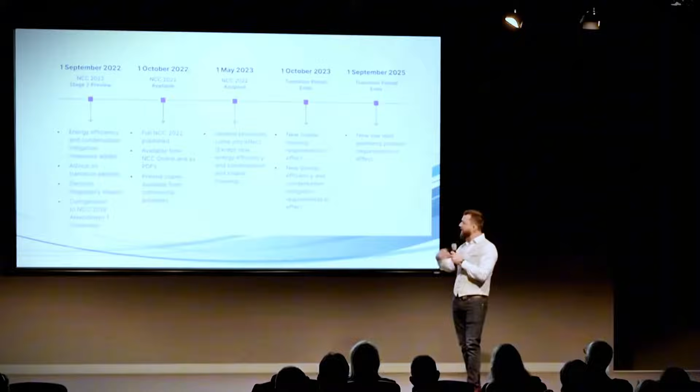So NCC 2025, I'm going to build on all the things that Ross talked about before. We did just have our public comment draft. I've modified this slide from when I did it in Sydney; we were actually in the public comment draft process at that time, so that's now finished. And what's the point? The point is that there is a process to updating the NCC. Now, I wish we had one of these for the current process. This is actually the last NCC, when we had 2022 revised. So this is a bit of a roadmap they used then to say we're going to have multiple stages of public comment review. I assume the same thing will happen this time. And then it will go into adoption stage and whatnot.

So what's it mean for us? Well, it means that there's change coming, right? Pretty simple. What are those changes going to be? I'm going to explain that by working our way down the hierarchy of the NCC. I'll start at the objectives and functional statements, touch them briefly before going into the more important performance requirements and then the new DTS provisions. So our objectives, and I think there's a really good consistent theme of simplifying things and taking out complexity. Water is water. And just allowing the document to be more usable.

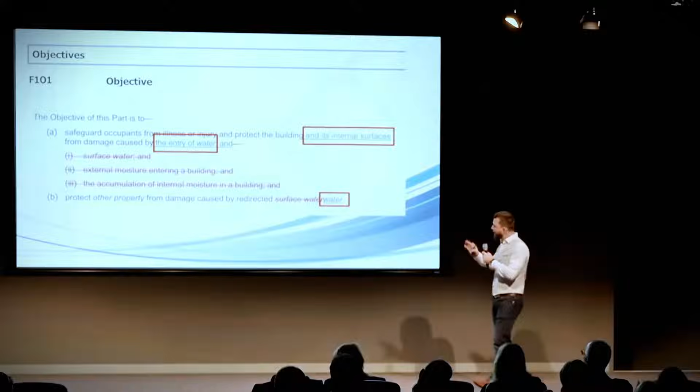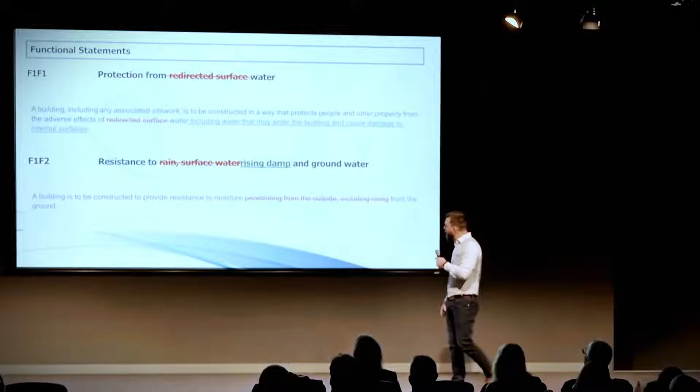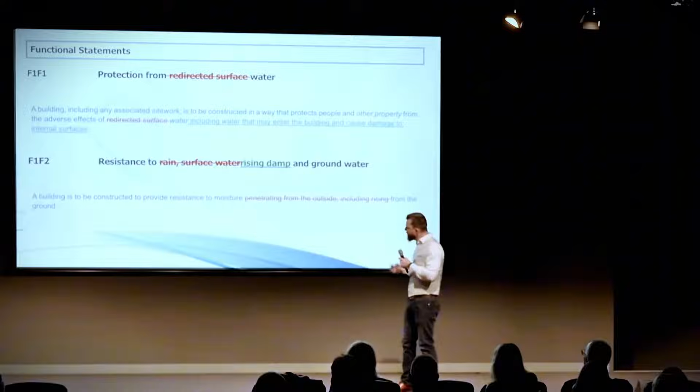So one of the introductions here is that we're protecting the internal surfaces from damage caused by the entry of water. We've taken out a lot of fluff in the middle there, and we've simplified it down to just water. So it really makes the objectives nice and clear. Functional statements are really more of the same. You can see we've taken redirected surface water and it's just protection from water now. Excellent. And in functional statement number 2, we've really made that more about below ground, because historically addressing below ground requirements and outcomes was gravely lacking. So it's really good to see that we've carved this out. It's not about rain and surface water anymore.

It's about rising damp and groundwater for functional statement 2. So performance requirements. This is the meat. This is the NCC as a performance-based code. So these are the things we're aiming to meet. And in our previous iteration, being 2022, we actually had 5 of our performance requirements. That's been condensed down now so that we effectively only have 2, performance requirement 1 and 2.

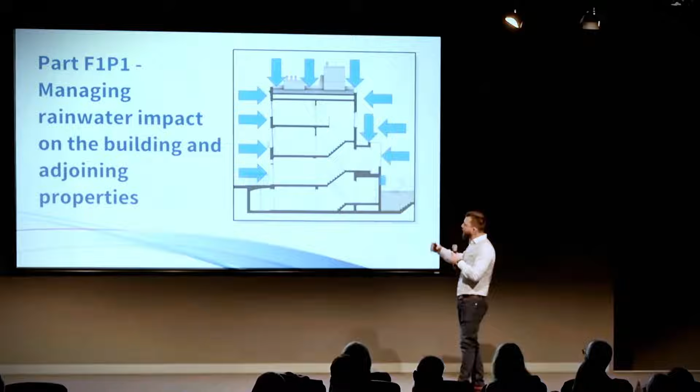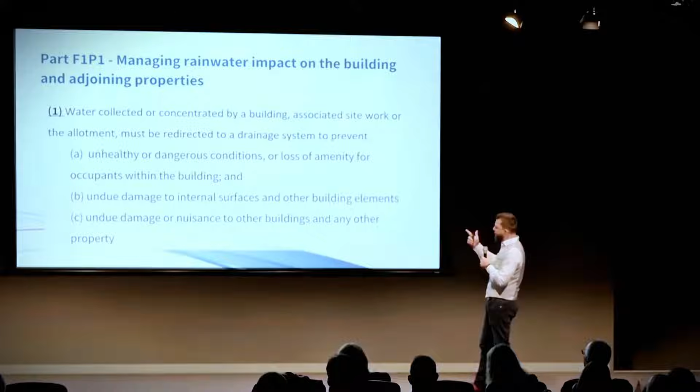And the first one we're going to talk about is P1, obviously. And as my nice arrows are showing up here, P1 is about managing the impact of rainwater on the building. So it's pretty much everything above ground in a nutshell. So we'll go into a bit of the clauses here and have a look at them. So this is the most important one. Water collected and concentrated by a building or associated site work allotment must be redirected to prevent A, B, and C: unhealthy or dangerous conditions or loss of amenity, damage to internal surfaces, or nuisance to another building.

Okay, so Ross touched on this one quite well, really condensing down water from all of these things that were randomly mentioned, which opened up a lot of dispute about, well, I don't have to protect against this one, I do have to protect against that one. So now we've just got plain old H2O, and that's what we're protecting against.

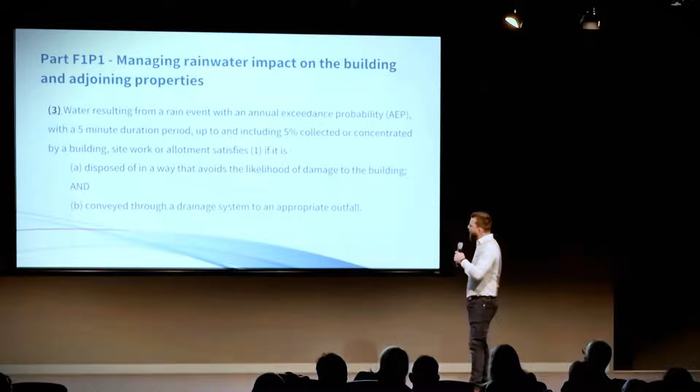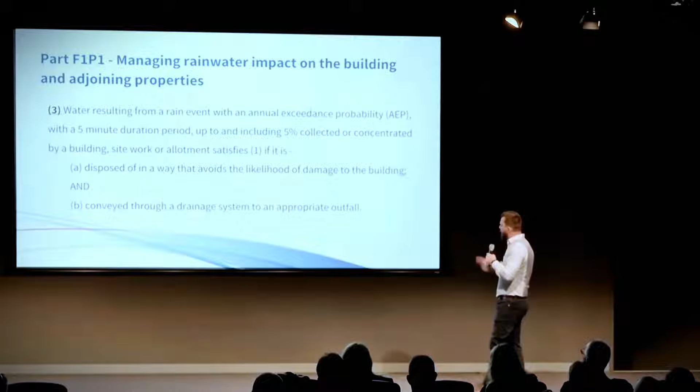So this one here starts to get a little bit complex and mathematical on us, but we do have to define how much water we have to handle. So we've got our 5-minute duration period. So we need to collect and dispose of it in a way that avoids likelihood of damage to the building. And it also needs to be conveyed through a drainage system. So that's a 5%. That's also a 1 in 20 year event, if anyone's more familiar with that terminology.

And then we go to the next clause. And now we're talking about a 1% event. So these are actually our 1 in 100 year events. They're a lot more intense, and we have a little bit more lenient things here. So we effectively need to shed water away from the building as well there.

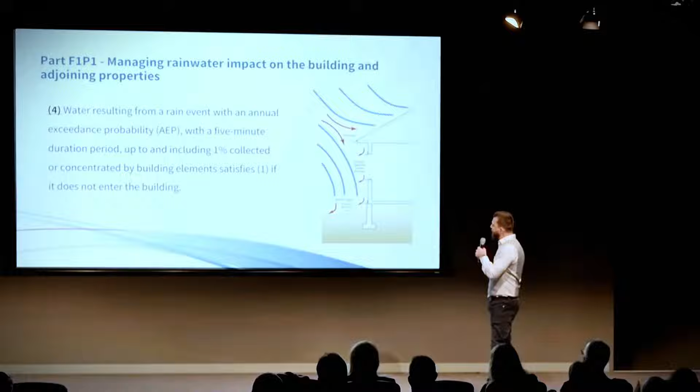So I'm going to grab a drink of water here quickly, guys.

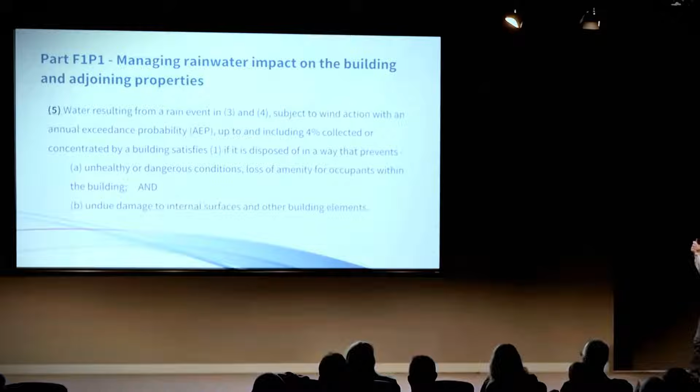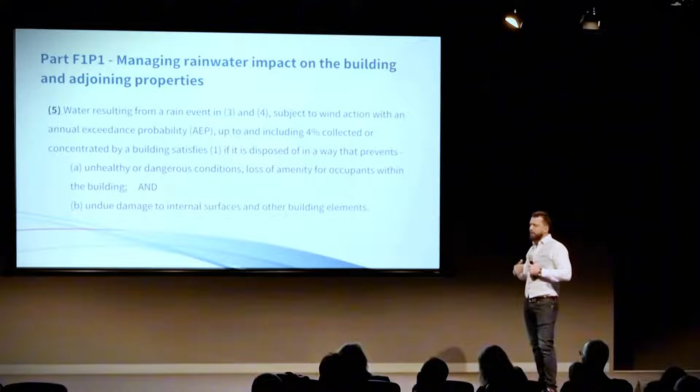Okay. So I did have to cut a couple of slides out here that talked about what our annual exceedance probability is, so I could talk about the Design Practitioner's Guide. But the important takeaway that I'm going to move through quickly here is that we need to make sure our buildings achieve their amenity outcomes, they prevent dangerous conditions or the health of our occupants being damaged, or internal surfaces.

So this is where I really just simplify it down. So what we're trying to say is that where the rainfall intensity is greater than the peak runoff, we get surface water accumulation. So to really make it simple, and all that jargon we had up there before, it was that you need to be getting water away from the building faster than it can accumulate in a 1 in 100 year event. So I've got a couple of videos here which show what happens when we do not achieve that.

Not sure if we have some volume here. It's not really critical, but I think I'm getting some help behind the scenes here.

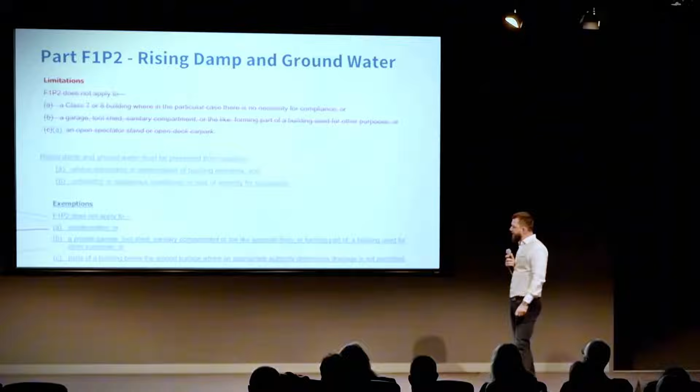So now moving on to part 2. Remember, part 1 is above ground. Part 2 is going to be our below ground. And this is effectively what we're working with. So rising damp and groundwater must be prevented from causing undue dampness or deterioration of building elements, and also unhealthy or dangerous conditions, or loss of amenity for occupants. Very logical outcomes that I think we all agree we do want to achieve in these scenarios.

And then we also have an exemption down the bottom there. Okay, so here's my diagram, pretty much just reinforcing that point that we do want to stop our groundwater from causing a problem to our internal space.

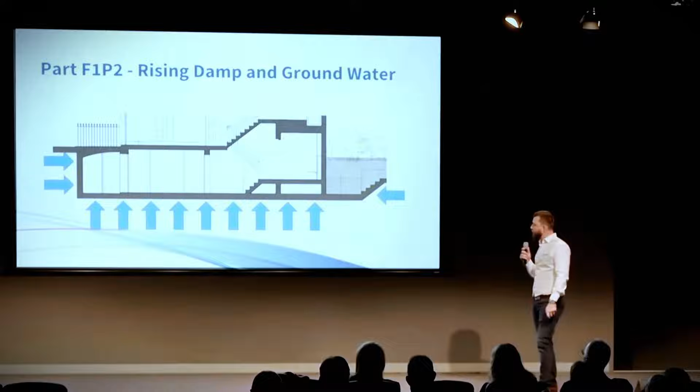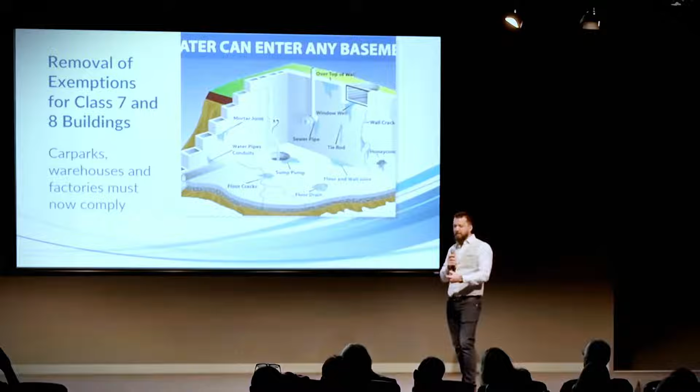Now, a key change is the removal of the exemptions for class 7 and 8 buildings. So historically, and I think this was a huge flaw in the current and previous versions of the NCC, is that it had these exemptions in there, and the way it actually played out in the industry was that certifiers were unable to really make any demand of their clients to say you need to have something in place here, because the way these exemptions were worded, whether it was intended or not, it's how they were used.

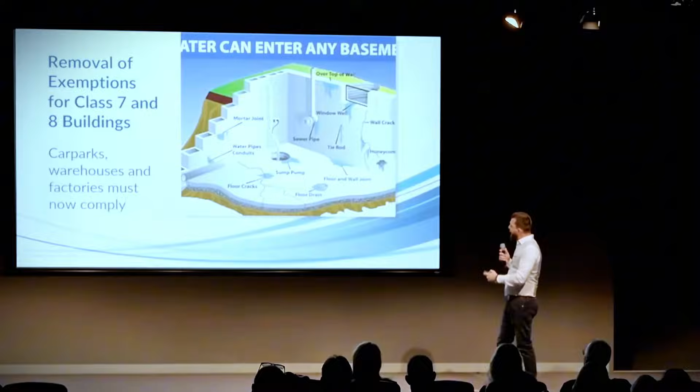So the way it played out was, we just don't even really need to think about it. We don't need to prove that it's good enough. We don't need to think about, oh, it's a car park, but we've got plant room with sensitive equipment. We've got storage cages directly against the wall, which is potentially a wet wall, the mold that might aggregate from that. So it's excellent that that's been taken out, because it does make a big difference in preventing this sort of situation. I can tell you, and I will play this.

There we go. We got a bit of sound there. I need my ominous music.

So a really good change, because I don't think anyone, or I hope not at least, that anyone in this room would want to argue that these are actually acceptable things that you would want to have in one of your properties, or have your family exposed to. So the question is then, if we're now needing to address this new, very clear, very solid, below ground performance requirement, how are we going to do that?

And see if I've got a laser pointer here. No, that's the back button.

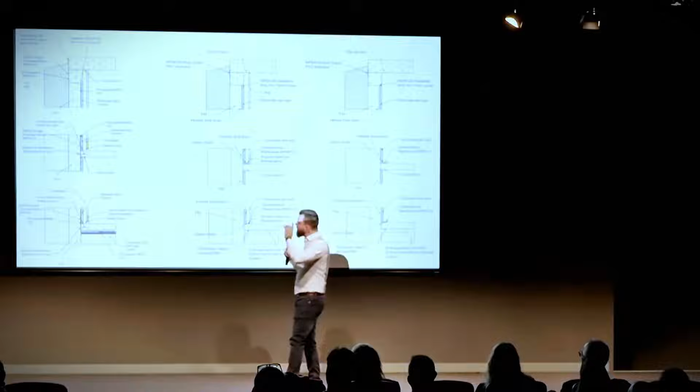So to use it comparatively, the one we have on this side here has a full continuous pre-applied waterproofing sheet membrane, big plastic bladder around the building. And then we have a drain cavity on the inside as well. So we actually have two lines of defense.

So this is a pretty robust system where even if you needed to have habitable space on the inside of the basement, you would be pretty confident that you've got enough protection measures in there to offset the potential hydrostatic risk from the water outside, right? So that's something more robust that you might use when you have a higher consequence or even higher water table on the outside, higher risk.

And then we have in these two here, I'll just combine them in my explanation. You have a little bit more of a limited amount of protection. There is no continuous waterproofing barrier. We do have different types of drains. We have a concealed cavity drain there, and then we have just an open wet wall here. And I'm not saying that every basement should be tanked or whatnot.

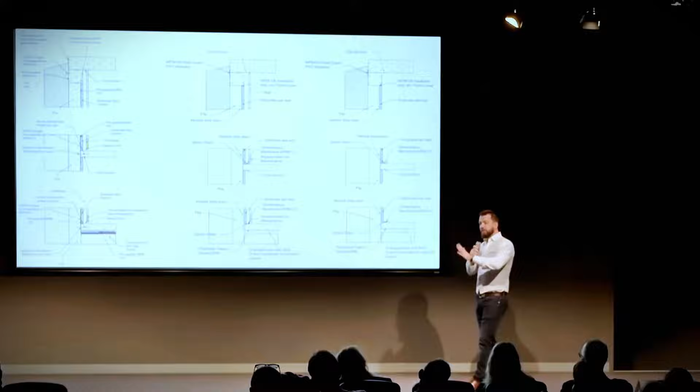I do think that there is a place for allowing a controlled amount of water in, but the key word is controlling it. And if you can prove that, and this is what performance solutions are, they're big proof documents, effectively. If you can prove that the water or dampness that you are allowing into the space will not impact the finishes, it will not impact the health or amenity, and it won't impact the structure, those are our performance requirements, right?

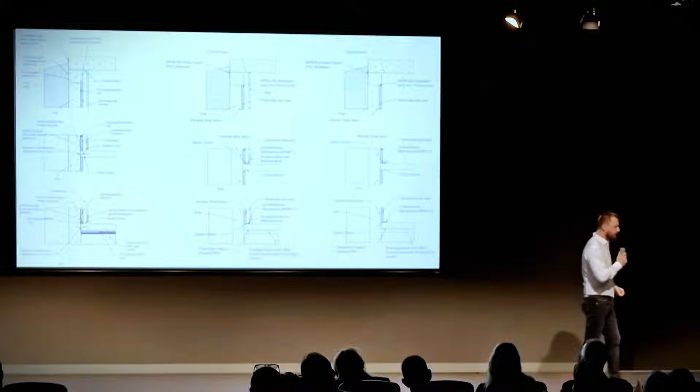So that's the decision-making process that you go through with a performance design, and it's what you can expect to see that the industry is going to attend to a lot more carefully now that we actually have these clear requirements in place. So that's our performance requirements, right? We're working our way down the hierarchy here. We've covered our performance requirements, our outcomes we need to achieve.

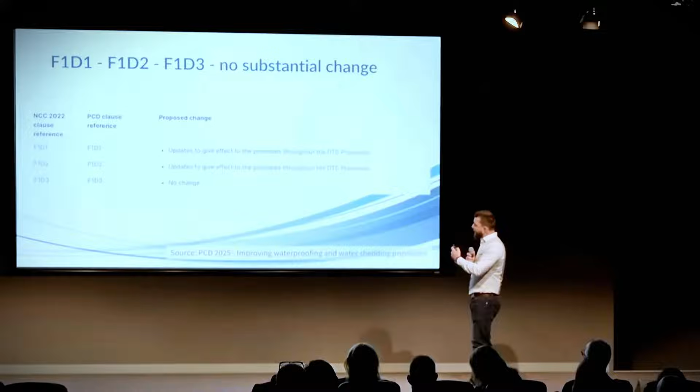Now we're going to have a look at our new DTS provisions that have come in. Ross has touched on these previously. I'm going to elaborate and give a little bit of examples, and we're going to work our way through all of the parts 1 to 15 just for clarity and conciseness, even though there's a couple in there that don't have any changes. Speaking of which, D1 to D3. For expediency, I'm just going to note them, but we are going to skip past them. I won't rehash what they are, but there's no change there.

So now we get into D4, which is our interesting one. We have a very clear statement about the structural substrate having a minimum of 1 in 80 fall. And then also something that we previously had was our drainage system that needs to convey the water in accordance with our hydraulic standard there. So that's our first point, 1 in 80 in the structure.

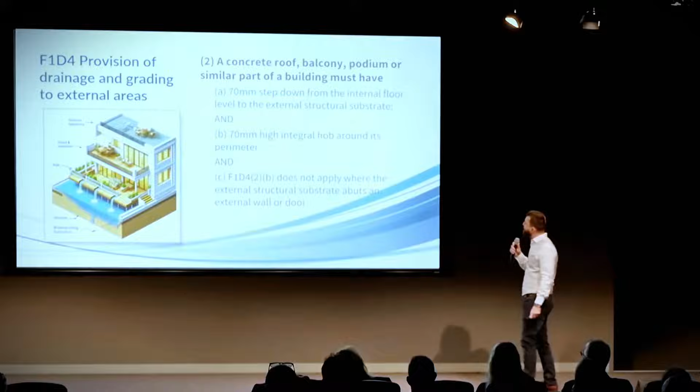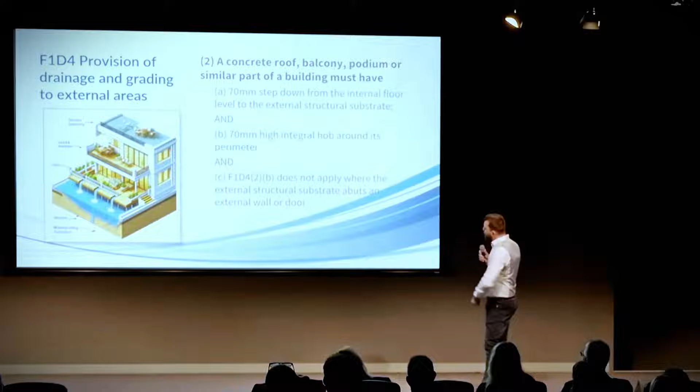Now, this is where it starts to get a little bit more nuanced in the way that you've got to read these, and I'm going to give some examples on each of these. So I'm going to jump straight into A, and then we'll progressively work through the examples on B and C. So for A, we've got 70 millimeter step down, and the words are very important here. And like Ross touched on, there probably is some fine tuning. So 70 millimeter step down from the internal floor level to the external structural substrate.

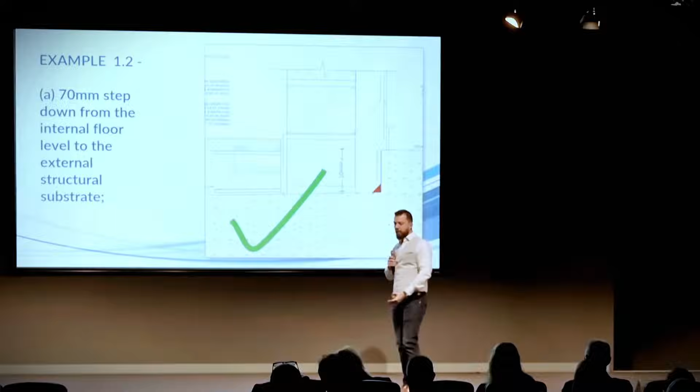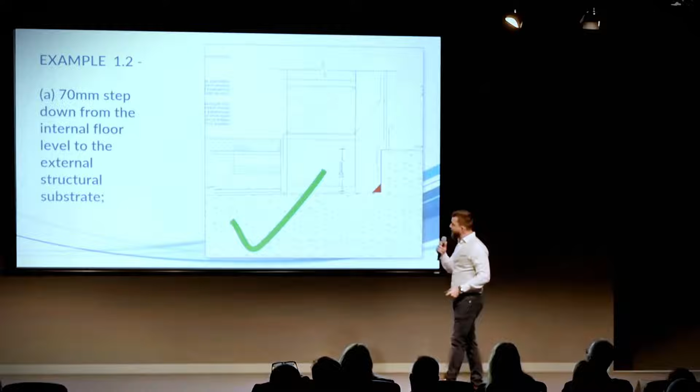All of these requirements are equally applicable to walls as well. You need to get that continuous waterproofing upturn, structural upturn in this case. And that's what I'm trying to show off here. So 70 mil step down in our wall.

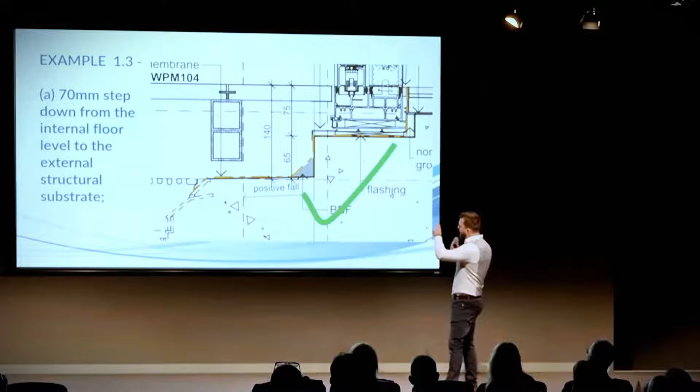Excellent. So now we've got something a little bit more complex here. You can see we've actually got a quite large 140 millimeter step down here. And if you follow the direct words there, we've got our external structural substrate, and then our internal is all the way up at 140 millimeters above. So quite good.

Now, this is the point which needed a little bit of clarity, right? Because in this particular image, you can see that we've got a flush transition there, and our concrete slab is also almost flush. And it does actually comply with the current wording, but I know that the intent here was to actually have a structural step up so that we have a structural barrier. So one of the public comments I made, and I'm sure others did as well, was to look at that wording and say, we know the intent is to have a structural fold there.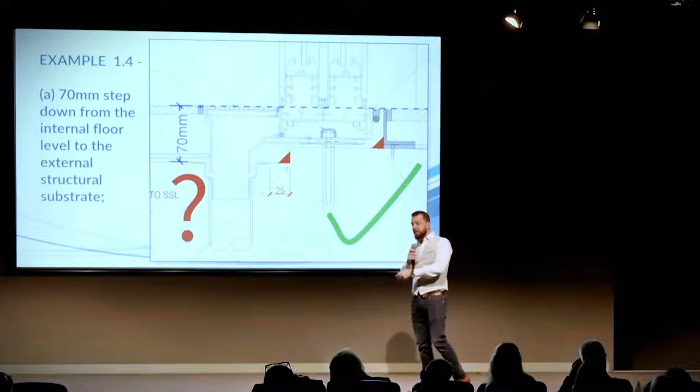So currently this detail is actually compliant with that, but we're expecting revisions to be made off the back of public comment that will fine tune this. So we'll see that when that comes out. And we've got the next year or so to work up towards it before we need to start designing and constructing these.

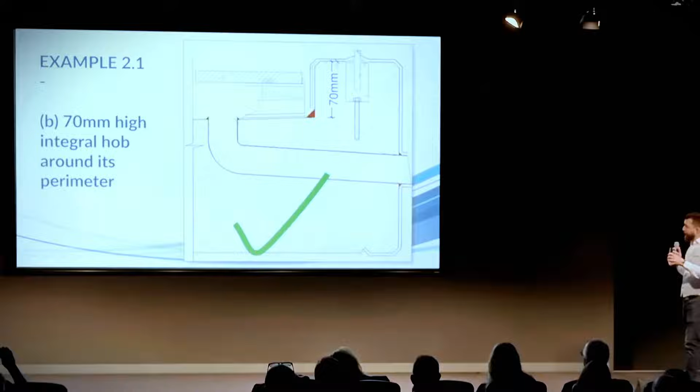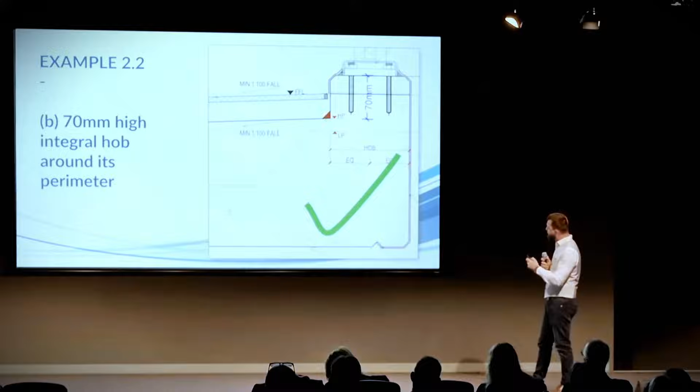So now we move on to point B, which talks about having hobs. Nice simple example here of a 70 mil hob around the perimeter, tile and pedestal on the inside. And some good drainage as well. Similar but different here, we have tile and screed on the inside. Still has the 70 mil integral hob around the perimeter. And so the question is, if we need to have a 70 millimeter integral hob around the perimeter, do we put another hob on top of the step down that we already had?

Well, to answer that question, we have clause number C. And what it says is that you don't need to put the hob where you have an external structural substrate that abuts an external wall. And again, the wording there's a little bit tricky. So I put up a diagram here, which clarifies where you need to have a hob, where you need to have a step, and also where we have a wall which is external to external, where you don't need anything at all. So I think this clause is actually really well worded. It just takes a little bit of time for you to get your head around.

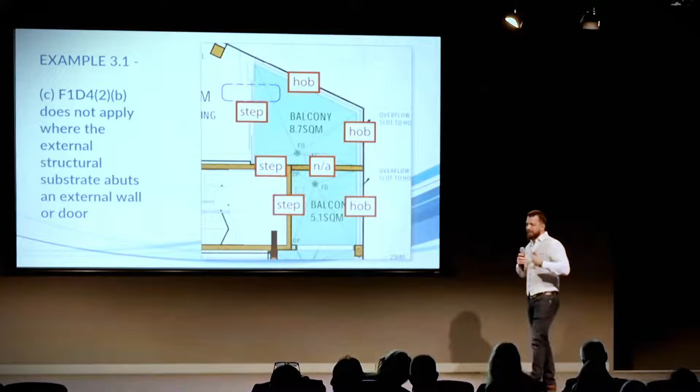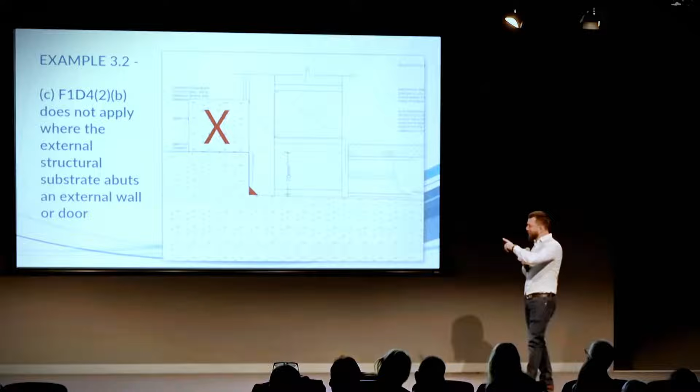Cool. So yes, we've clarified that we do not need an extra 70 mil hob on that step down. If we have any concreters in the room or anyone that's in the know, I'm sure you'd agree that that would be extremely hard to form, both a set down and a hob on top of each other. So very good to know.

Point number 5, substrate materials. So we now have this new clause which pretty clearly states that the structural substrate can consist of either reinforced concrete to AS 3600 or an FC sheet that complies with AS 2908.2. And of course, it needs to be free of any variation or defects that would impact the performance of the membrane. So that gives us a very narrow scope of what you can apply your membrane to.

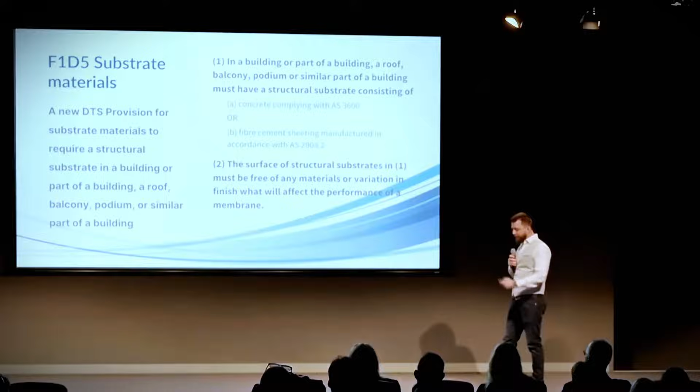Because just to be clear, the substrate is the surface to which you apply a membrane. So you can apply a membrane onto those, but not anything else currently. So let's have a look at some diagrams here to explain that. Here are our 2 compliant substrates. Well, the reinforced concrete isn't poured yet, but you get what I mean. Cool. Now, we have established that, I'll just go back. We are going to talk about this a little bit more in future slides where it combines with another clause. But just for now, just remember, those are our 2 substrates that are acceptable to apply a waterproofing system to.

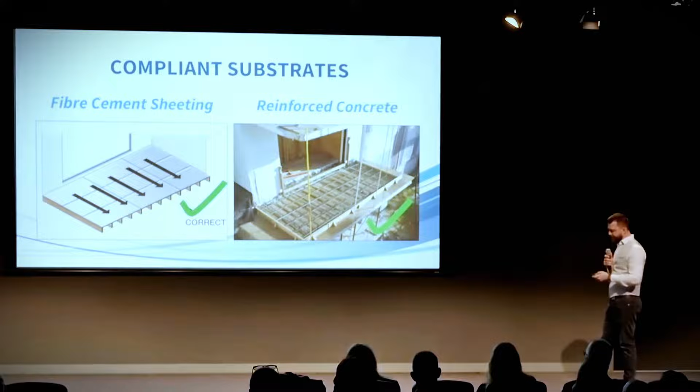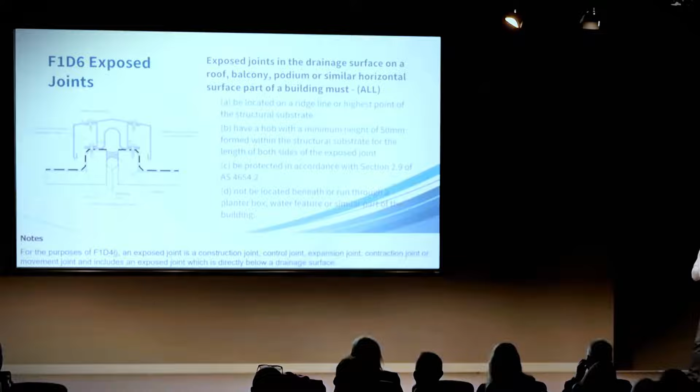But before we do that, we're going to talk about exposed joints. And these have been bolstered up a little bit here. So we really have 4 things that we need to cover. So the joint must now be located at a ridgeline, at a high point. So high point is created by the drain points being the low point. You need the water to fall to the drain. If you make sure that you have your movement joint, which has a hob and whatnot, at the high point, you're never going to get into a scenario where your water is trying to run to the drain and it gets blocked by a nice structural movement joint here.

Point number 2 is that it must have a hob on either side. We've seen plenty of movement joints that are built with just 2 flat slabs abutting against each other. That doesn't provide any structural upturn barrier to water leaks that might occur in that scenario. So we now must have a 50 mil hob on either side.

Point C is that it needs to be protected in accordance with our external waterproofing standard. That is where that detail shown on the left there is taken from, our external waterproofing standard. And finally, and this isn't a new one, this has been in the NCC 2022, it says that these joints must not be located beneath or run through a planter box, water feature, or similar part of the building.

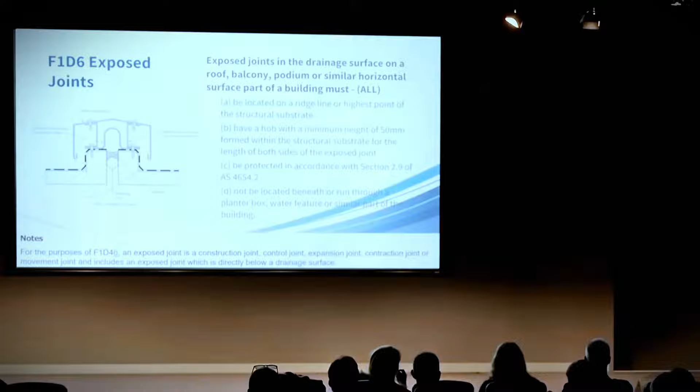Now, a question we get on that one is, well, this is just movement joints, right? We agree that movement joints shouldn't run through a planter box. But what about my CJs? This doesn't apply to that, right?

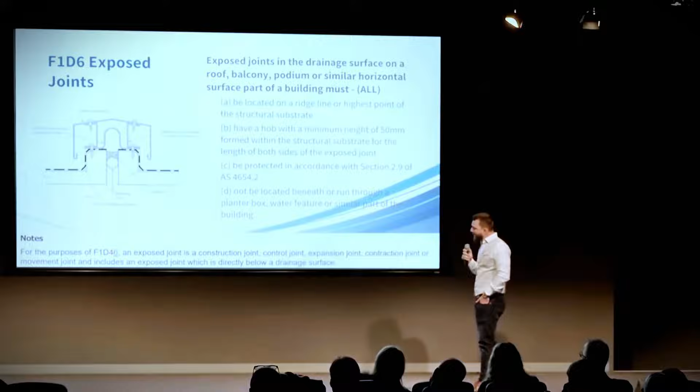Well, we have our note in the NCC here, which states very clearly that for the purpose of this clause, an exposed joint is a construction joint, control joint, expansion joint, contraction joint, movement joint, or any other type of joint. So don't fall into the trap of thinking it's just if it's got movement. It is any type of joint that you must apply this to.

Okay, external waterproofing membrane. I've only highlighted point number 2 here because point number 1 existed previously. It's nothing new. It says that we need to have compliant waterproofing materials installed in accordance with the standard. What is new is that this compliant membrane, where it's required to be applied to a concrete roof, balcony, podium, or similar horizontal surface, must be installed directly on the structural substrate.

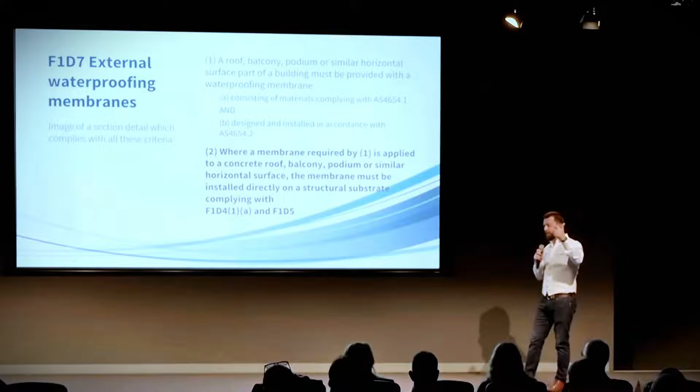Keep in mind, before we identified that our structural substrates are only reinforced concrete and fiber cement sheet. So if you're reading between the lines, this is taking out screeds, which I'll talk about in a moment. But before we do, what comes before you actually apply a membrane? Substrate preparation. In order to apply a membrane to a substrate, you need to prep it, right?

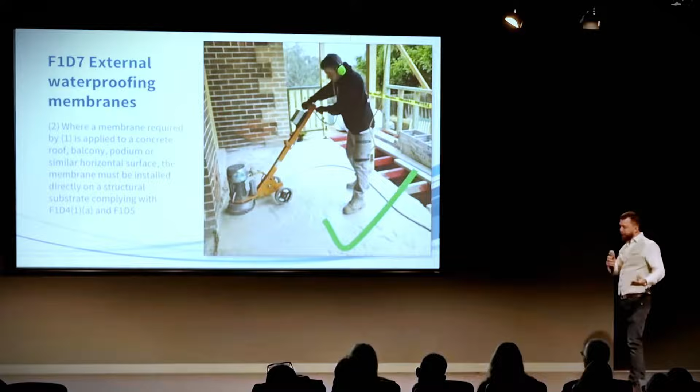So grinding it, no problem. You're just changing the profile of that structural substrate. You wouldn't grind an FC sheet, but reinforced concrete's no problem. So that's okay. But with the current wording, and this is something that I have no doubt will be addressed in changes, I put my own public comment in about it.

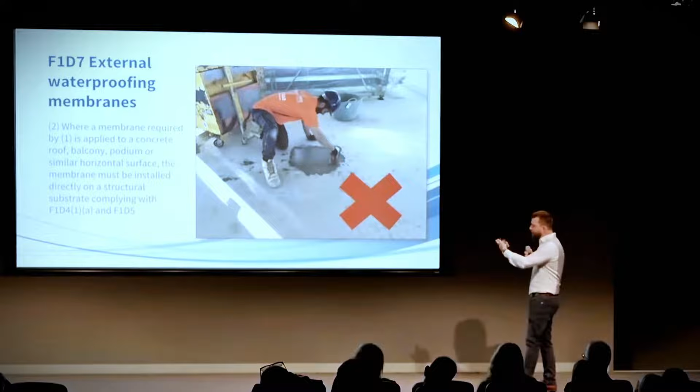If you apply a repair mortar, a leveler, or anything of that sort, that's not technically reinforced concrete in accordance with AS 3600, right? So if we're applying a membrane over these repairs, we're technically non-compliant with those clauses. I'll just put a couple of other examples up here. Same thing.

So we're yet to see how this will be addressed, but a logical accommodation might be to say that you can do localized patch repair to up to 10% of the concrete surface area or something to that effect, which means you could easily do your set downs around the perimeter. If your concreter stands on the timber and all of a sudden you have a big rebate in the set down, you could do localized repairs on those, but there would be a limitation. So we'll wait to see what comes out of that, but this is currently the state of it.

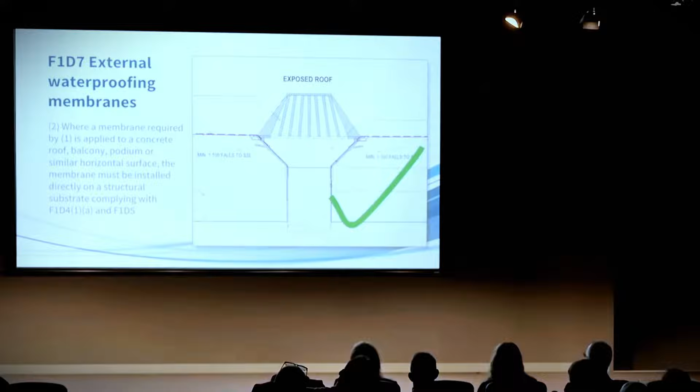So nice little diagram here showing a waterproofing membrane applied to the structural substrate. Pretty simple. So that gets our compliance tick. And then we've got a comparison here, half right, half wrong. This diagram shows the two options which are very commonly employed in, say, internal wet areas or balconies. This is a balcony here.

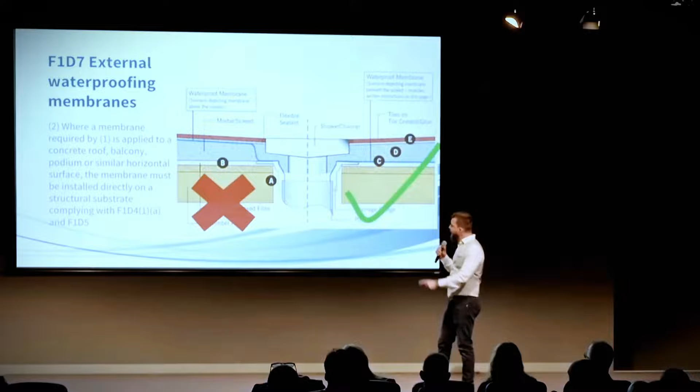On the right-hand side, we have our waterproofing membrane applied to our structure, FC sheet in this instance. On the left-hand side, we have a waterproofing membrane applied over the top of the screed where falls have been achieved. Now, I will note that the one on the right is also technically non-compliant because there doesn't appear to be any fall in the structure, but for the purpose of this particular clause, the membrane has been applied to that substrate correctly.

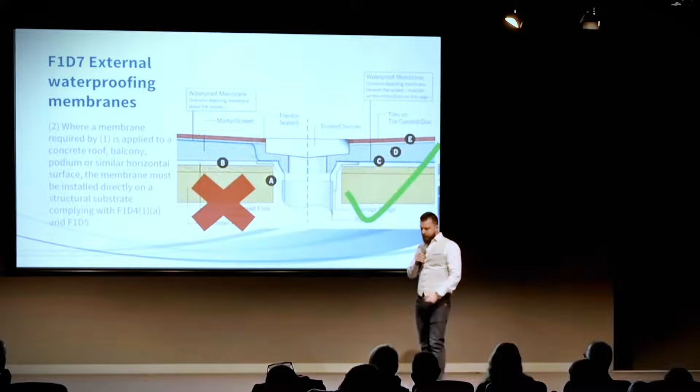I'll just touch on this one really quickly as well, warm roof buildups, for anyone that's in the remedial space, condensation management.

Tim, I'm looking at you.

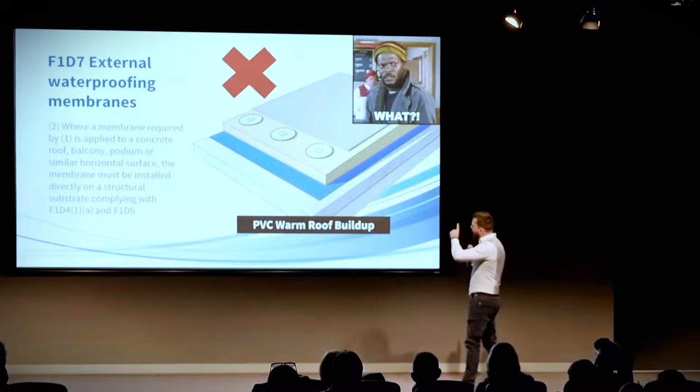We're effectively applying our PVC sheet membrane. And this is a really good buildup, by the way, one of the best things you can do with your building. We're putting it over the top of our insulation. So technically our waterproofing membrane is being applied on insulation, not on the structure.

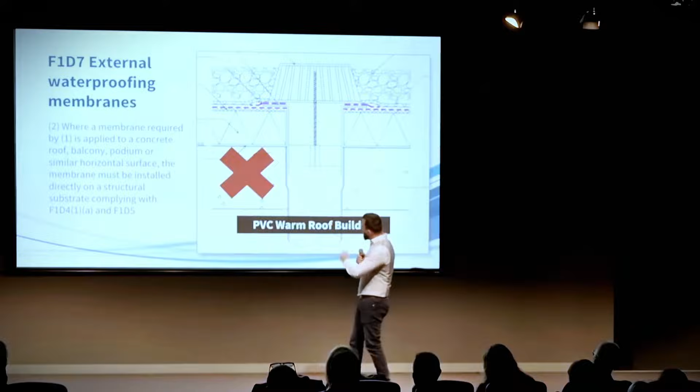Another detail that shows pretty much the exact same thing. Now, you might be wondering why, if this is non-compliant, I said it's a really good detail. It's just not covered by the DTS provisions at the moment. You always have a performance-based pathway, and I'd be extremely happy to validate the performance of this system because it does work really well. Okay.

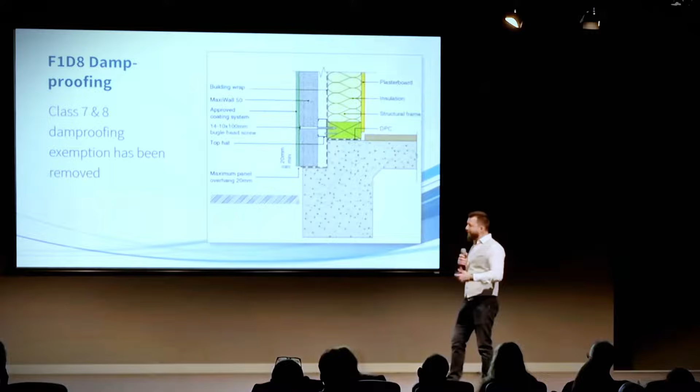Now, damp proofing. We've effectively just removed our class 7 and 8 exemption here. You've got to remember, a lot of people will look at class 7 and say it's a car park. Well, what's the problem? Class 8s also include laboratories. Class 7s do include warehouses and stuff as well. These areas can definitely be very sensitive to moisture. So having these exemptions removed, so we're forced to think about whether we're doing enough, makes a lot of sense. No change for damp proofing.

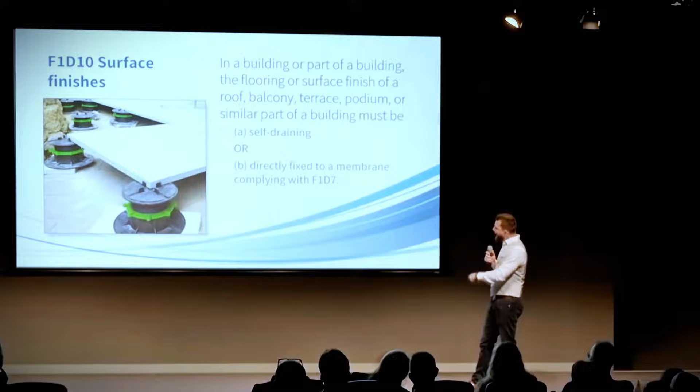Surface finishes. I won't talk too much about tiles and pedestals because I think Ross covered it very well. So we've got two surface finishes. They must be either A, self-draining, such as our tiles and pedestals, or say a timber deck as well, less common but still complies, or B, directly fixed to the membrane. And that's the one I want to talk about. So in this scenario here, you can see that we've got our FC sheet system. We've got our waterproofing applied directly to our structural substrate. Great. And then we've also got our surface finish directly applied to the membrane.

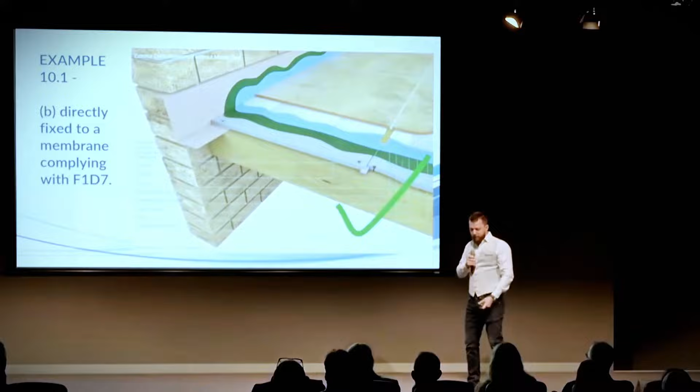So now we're adding up all of these clauses that we've been talking through. And I hope I haven't lost you. We're adding them all together to say, okay, this is what a compliant buildup looks like now. And I'll just show something to the contrary. When we put a screed in here, even though we have our waterproofing membrane directly applied to the FC sheet, our floor finish being the tile is no longer directly bonded to our waterproofing membrane.

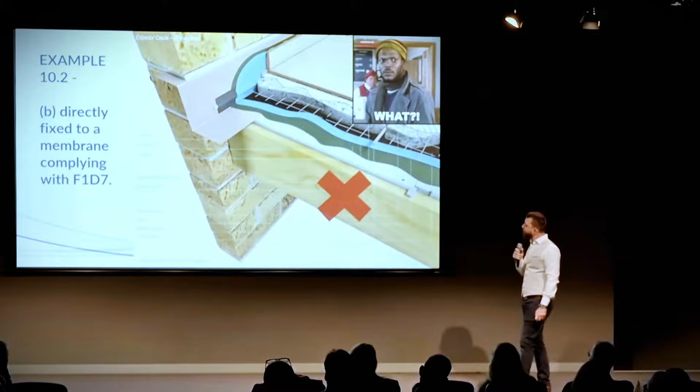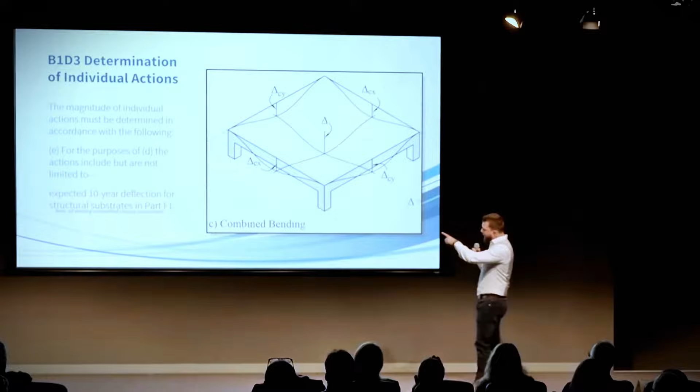Cool. So 11, 12, 13, no changes. 14 is for glazed wall assemblies. We've again removed those exemptions. So yes, things that we weren't previously thinking about, we now have to validate, be aware of that. And finally, we've had this added in. It's not in the waterproofing DTS provisions, but it is a new structural provision. And the key word there is that we now need to calculate the expected 10-year deflection for structural substrates. Reason being, as Ross said before, you have deflection, you didn't have ponding before, you now have ponding, entrapment of water, and inevitable failures.

So I moved through that a little bit quickly, I know, but I want to recap now to really just drive home the current state of it. Does anyone want to guess what our 4 key points for DTS compliance were? Anyone brave enough to put their hand up? There'll be a prize in it for you later. Yes, we've got one. Fall in the structural substrate? That's exactly right. That's one of them. Anyone want to pull another one? Membrane directly on the substrate. That's exactly right. And what does our substrate have to be? Concrete or FC sheet. That's exactly right.

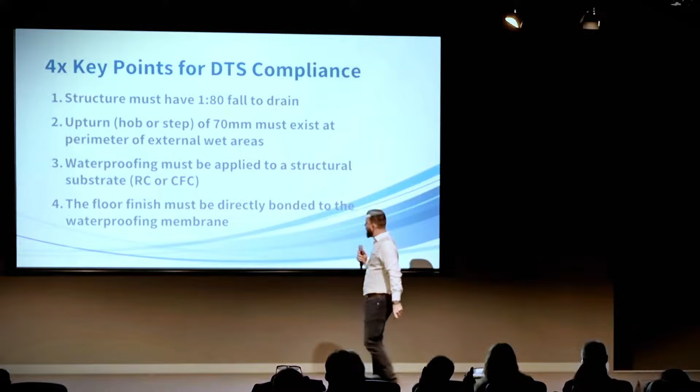There's one more I'm looking for. 70 mil, yes, that's in there. It's actually combined into one of them, so that's awesome. What about the floor finishes? What do we have to do with those? Directly bonded to the membrane. So we'll reveal all of these now. This is really everything boiled down. All of those changes boiled down into these 4 key points. So definitely grab a photo of that one so you can have a think about it later.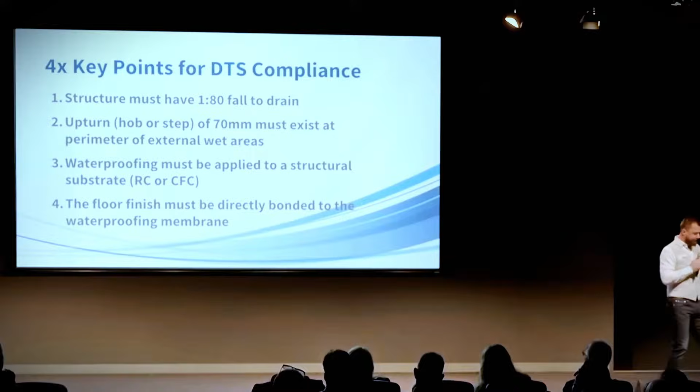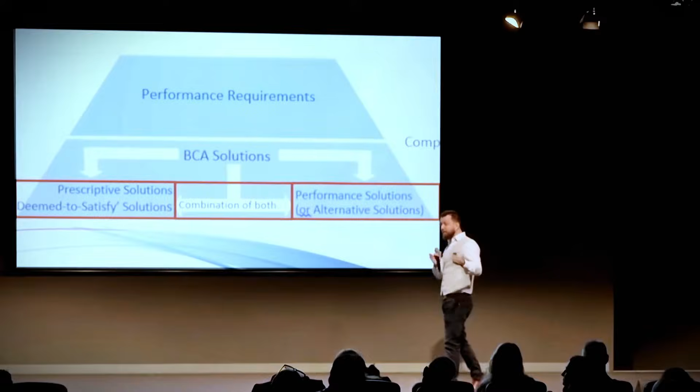Cool. So this might be a bit of a change, right? There's tilers that have been doing screeds forever. We're now saying that you need to direct bond your finishes. We need to do all of these things differently. Well, it's not as bad as you might think, because I'll take you back to how the NCC actually works. And while we do have those DTS provisions that say, if you do this, it will be compliant and it will also work, which is the point, we do have another pathway as well outside those.

And that is performance solutions. And this is a really cool diagram, really well done, which shows what those 2 different pathways look like. On the left-hand side, we've got deemed to satisfy. We've got our types of evidence there, which I won't read out. And then we also have our performance solution on the right-hand side. So we can go down that pathway of performance solution.

It is possible to build things with screeds, with a membrane on a screed, with various types of buildups that will work. It's also possible to build them so that they fail, which is what's happened, which I know Ross will say was a massive catalyst in making those changes. So what does it really mean for us? It doesn't mean that we can never, ever do those things that you're probably familiar with in conventional construction. It means that you have to think about it and prove it. That's all performance solutions are. They shouldn't be scary. There is effort that needs to go into them.

But really, it's just saying, if you want to do this now, prove to us, the certifier, the owners that are going to have to live in it eventually, prove to us that you've thought about everything that could go wrong here and that you have something in place so that you know it will work.

So, on to part 2. I'm running a little bit behind on things, so we're going to push through pretty quickly, but these are all pretty straightforward. I should give a bit of a preface here in why I really wanted to talk to you about this. We've been doing something very similar in New South Wales for the past 3 or so years now, right? And that's what I've got as the transition. I think after reading through the documentation practice guide, it takes all the good things out of what we're doing in New South Wales, adds in some extra things which make it even better. So I think you're off to a really good start by building on a foundation and learning from the mistakes that we've gone through in the past 3 years. So that's a really good thing.

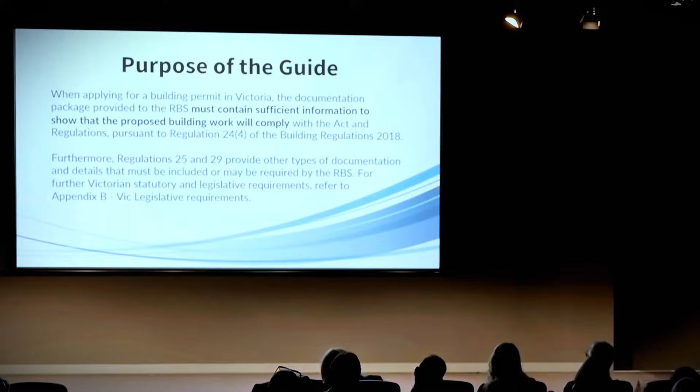Now, this is the purpose of the guide. For the sake of time, I won't read the whole thing, but the point in bold there says that the documentation package must contain sufficient information to show that the proposed building work will comply. If you don't draw something, if you don't have a section detail of how to detail an overflow, you are not showing how your building is going to be built that's complying, right? So that's really the name of the game, is to show what we're going to do. The building certifier, RBS, can have a look at it, and they can say, I see what you're doing, and I agree that it's good. So what does this look like?

Well, I'm going to read through the clauses, and these are the things I've picked out that are specifically relevant to waterproofing. There's a lot of non-waterproofing stuff in there. This is just waterproofing. So, point 1.2.2, building enclosure. Construction methodology details the waterproofing of habitable areas below ground. Pretty important. This is a nice diagram of what an effective waterproofing of below ground space would look like. Waterproofed wall, structural wall system. I believe this is a Dincel system.

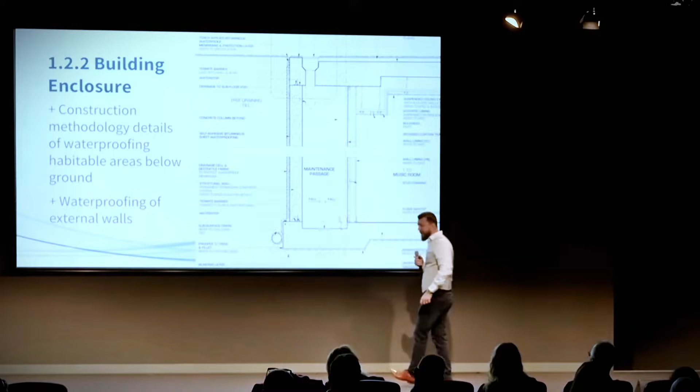Then we've got an internal maintenance passage, which controls the humidity. And then we have the habitable space on the inside there as well. Cool. Moving on. Section 1.2.3, waterproofing internal. We need to have layout plans. There's a whole lot of things that those layout plans need to show, such as extent of waterproofing, location of water stops, drain points, falls, and so on. That's actually detailed really well in the guide. I've just got some examples of what that would look like up here. We also need to show elevations.

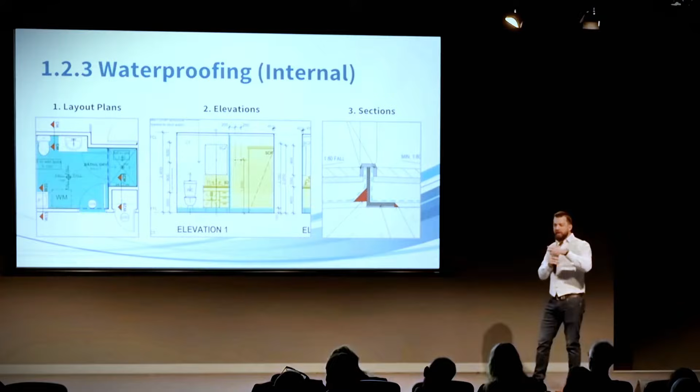That's a little bit of an old one, but it does clearly show the extent of various membranes. And then we need section details. Devil's in the detail. Where things go wrong is normally where a section or a junction has been poorly detailed. And I have a good example of that a little bit later.

So now we move on to external. External, again, we have layout plans showing our membrane and other things, and then we have section details. So one thing to be aware of is that our layout plans are 2D, right? We build in 3D, so we add in section details to give us that information on what's happening vertically through there, so that we can actually build it effectively.

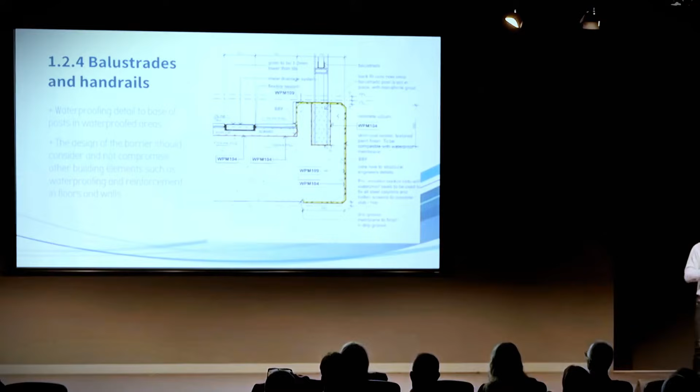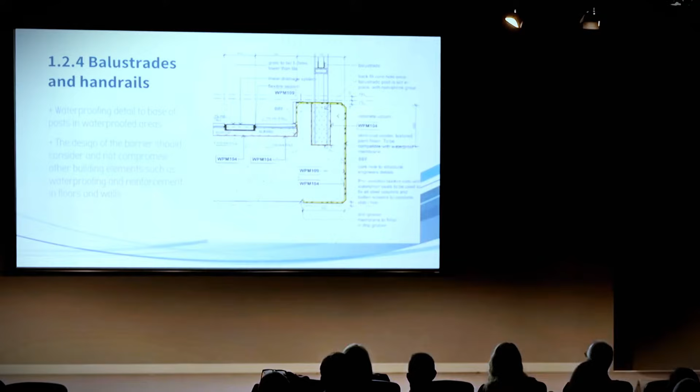Balustrades and handrails. This is mainly a structural provision, but it does wisely include a requirement for the waterproofing detail and how these will be detailed. And the design barrier should be considered not to compromise other building elements such as waterproofing and reinforcement. We see quite often that they're an afterthought. Waterproofing goes in, or the building finish goes in, and then come in the fixings and the base plates and just punch straight through everything. So talking about how we're not going to do that is a great idea.

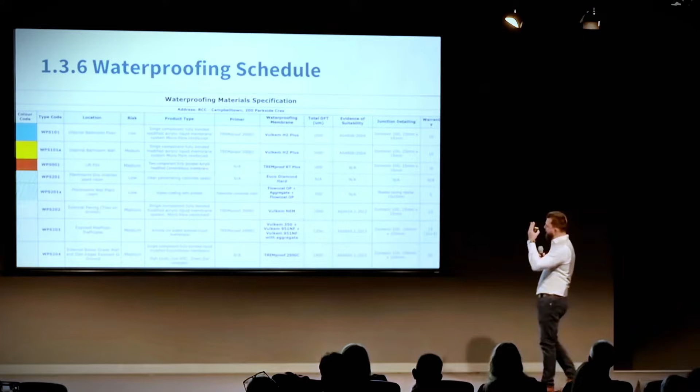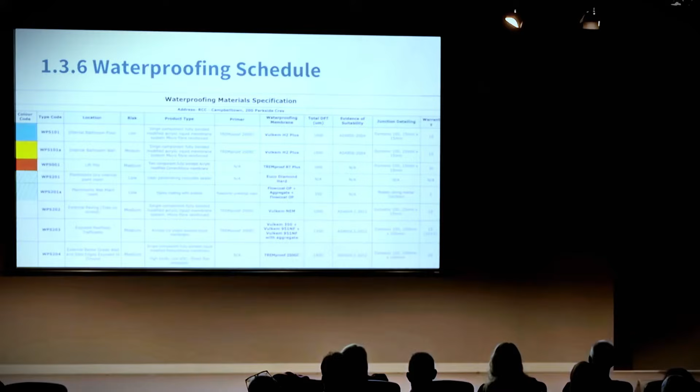We also have a little bit in lifts. Lifts, you don't want water in your lift, so you need to actually show how that's going to be achieved. And lastly is the waterproofing schedule. So this is a breakdown of all those different locations that are shown on our layouts. It talks about the risk in those areas, the product types, the primers. This is probably a little bit more detail than maybe is needed there, but it shows exactly what products are going to be used, because it's very easy and very common to use a good product in the wrong location and get a bad outcome.

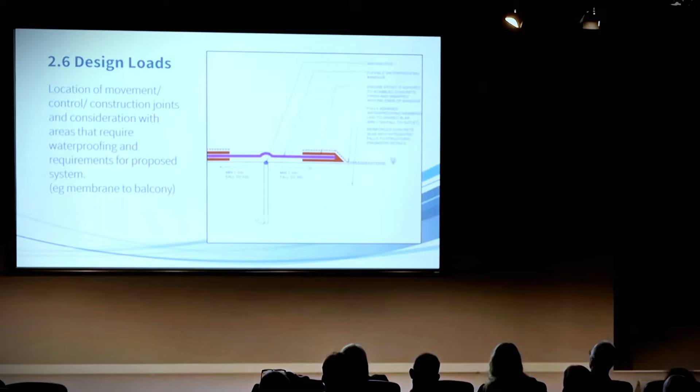Cool. Oh, we do have one more. So design loads, we also have this section talking about joints. Your design documents must show how they're going to accommodate structural movement, and we have a very basic movement joint here as well. And to wrap it up, I really like this part out of it. It says, the design practitioner, typically an architect or an engineer, should consider consultation with waterproofing consultants, professionals, or waterproofing industry bodies.

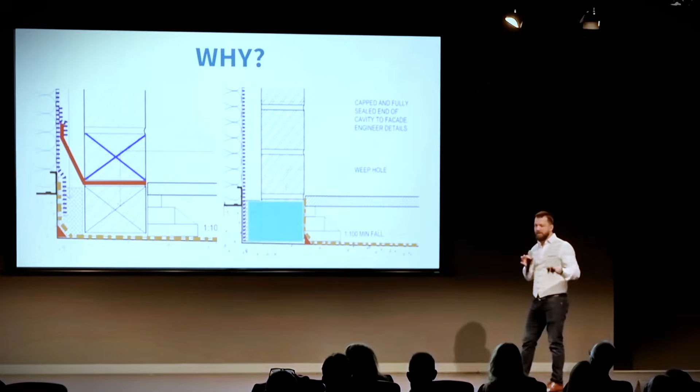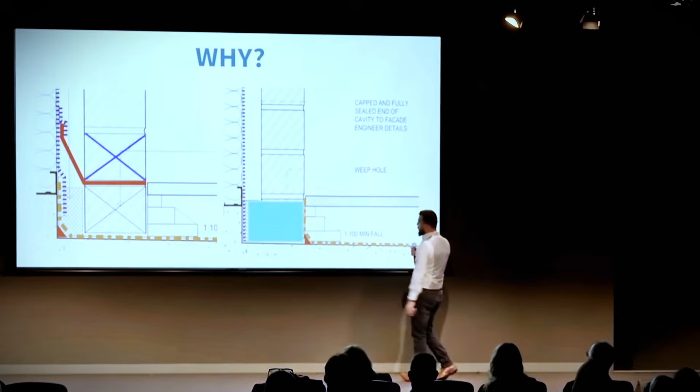So I just wanted to give this one real quick example of why it is really smart to get your design right on the front end. This is an extremely logical measure twice, cut once scenario, and this is the difference in outcome. On the left-hand side here, you can see a great interface between our waterproofing system and our weatherproofing system in facade. Typically, these will be two different parties that work somewhat independently, and if you don't have coordination in design, then you're going to end up with something like this, where facade handles the vertical, they've got the sarking, they've got everything in there, it runs down, and then the waterproofer comes in later because no one thought about it. They apply their waterproofing, they turn it up on the outside face of the brick, water's now trapped in the bottom of the wall like that.